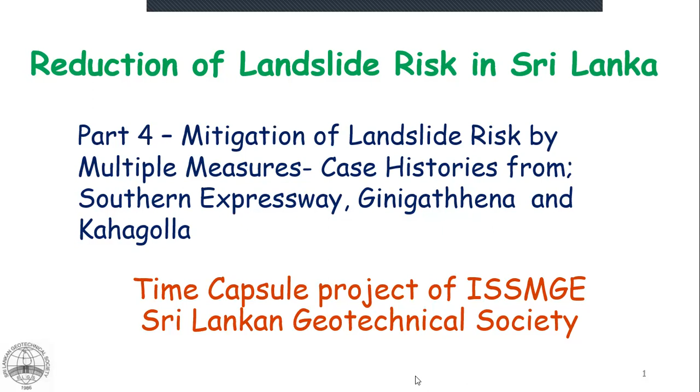As discussed in part 3, Professor Karl Terzaghi said that if a landslide has started to move, the means for stopping it must be adapted to the process which started the slide. So we should investigate and find the reason for failure, and in our countermeasures, attack the very reason that initiated the failure. In the last part, I talked about our experiences in stabilizing landslides by modification of the slope geometry and drainage.

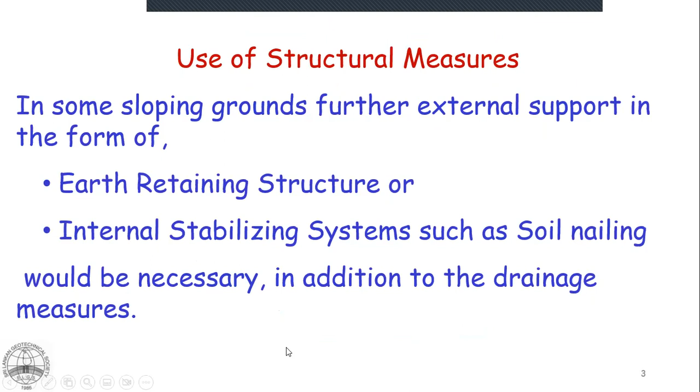In some sloping grounds, further external support in the form of earth retaining structures or internal stabilizing systems such as soil nailing or anchoring would be necessary in addition to the drainage measures. So these are some examples, some of our experiences.

This particular cut of the natural slope had to be done to provide a path for a bypass road in the construction of the Southern Expressway. There was a house at the crest of the slope, so if we had cut it to a normal gradient that the soil can withstand, the house would have to be removed. By constructing a gabion wall at the toe and providing surface drainage to efficiently run off the rainwater, we were able to do the cutting and construct the necessary road while keeping the house there as it is. The surface of the slope was protected by vegetation.

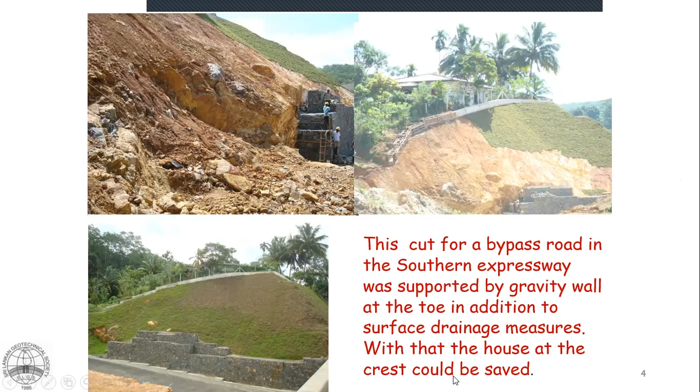This is another example. I have earlier mentioned that our slopes are quite stable during periods of dry weather due to high prevailing matric suction. This is the Colombo-Katunayake Expressway. Above it is the Negombo Road, A3 road, which is a major road. So this cut has to be made across this major road for the construction of the Colombo-Katunayake Expressway. You can see these near vertical cuts were done without any problem during periods of dry weather, but there are buildings close by, and this slope will remain stable only if the weather remains dry. But that is not the case in nature.

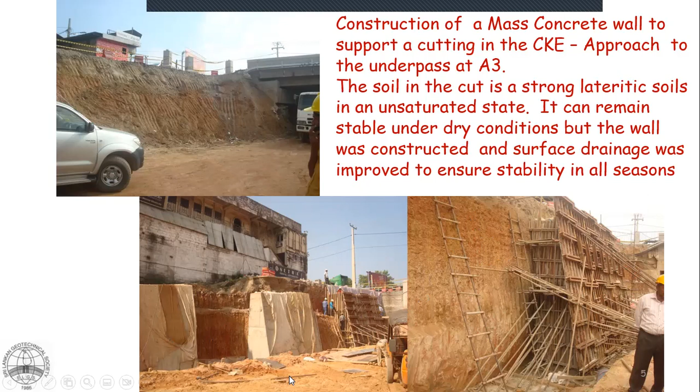So when rainfall occurs, there will be erosion, loss of matric suction, and failures, as we have seen in many places. In this case, the cutting was done during periods of dry weather, taking advantage of the high matric suction. A mass concrete retaining wall was done with weep holes and all the drainage measures, and there was surface drainage at the back of it, providing protection for all seasons with this construction.

This is again construction that we have done at a number of places. There are unstable slopes in the premises of schools, hospitals, etc. So we have done the cuttings during periods of dry weather, got to a hard surface, near vertical, maybe about 70-80 degrees inclination, and by placing the geotextile and the drainage layer, a retaining wall of random rubble masonry or mass concrete retaining wall is done with a back batter. Our analysis shows that when you have a back batter, the retaining wall design can be highly optimized.

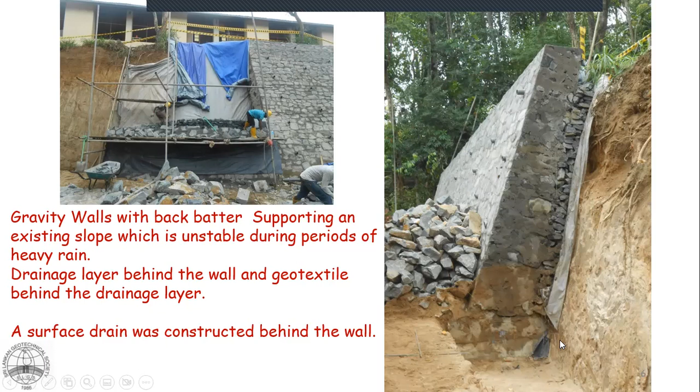So you can see the weep holes in that, and the geotextile placed at the back of it can be seen. So we can find a period of dry weather, and this construction can be done, ensuring the stability of this near vertical cut, and then protecting it for all seasons.

Another activity that we have used quite often is soil nailing. So in unstable slopes, after providing drainage, we have installed soil nailing, which is installation of a reinforcement in a drilled hole at appropriate spacing to an appropriate design length. Soil nailing is a passive system where the tensile loads in the nail will mobilize when the slope starts to move. Anchors, on the other hand, are an active system where the installations are pre-stressed. But in Sri Lanka, we have mostly used soil nailing up to lengths of about 12 to 16 meters.

As seen by this modified Bishop's equation, when the slope starts to move, tensile load will mobilize in the reinforcement - that is with a plus sign in the numerator, increasing the normal stress, and with a minus sign in the denominator, decreasing the shear resistance to be mobilized to maintain equilibrium. So both of these will ensure the factor of safety is increased. We have done our designs installing different patterns of soil nailing. To protect the nail from corrosion, it is placed at the center of the borehole by use of centralizers.

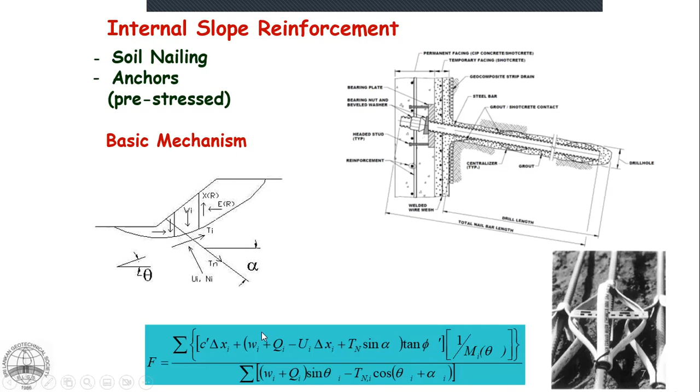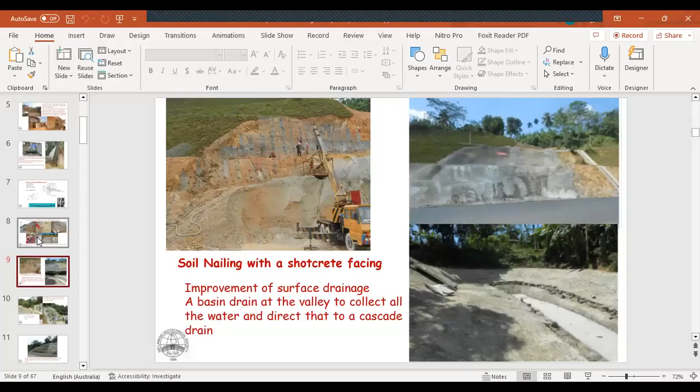This slide shows the construction sequence. This is a slope which was found to be unstable after excavation. It was stabilized by a soil nailing arrangement: drilling the hole and installing the reinforcement bar and grouting with a tremie pipe starting from the bottom, then connecting the nail heads with reinforcements. Very simple reinforcement was placed for the surface, and the surface was shotcreted.

This is another failed slope in the Southern Expressway. Cutting was done, but the drainage measures were long delayed, so as a result the slope failed. This is a zone in a valley where there is a lot of water coming from the adjacent slopes, so in addition to the nails, the surface drainage had to be improved at that area.

This shows the basin drain constructed to collect water coming from all directions, and how it was diverted down through this cascade drain. The nailing was done, and the nail heads were connected by shotcreting.

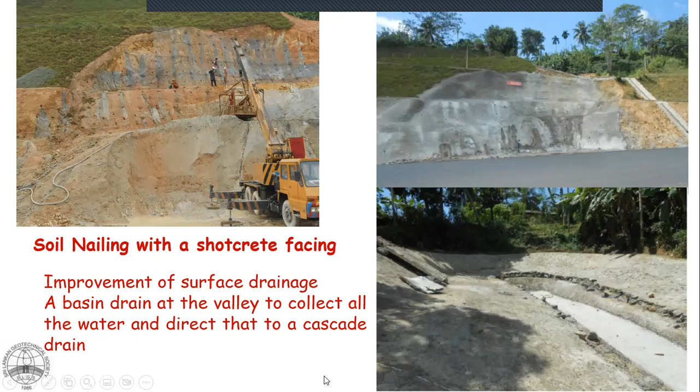Later on, we tried to avoid shotcreting as much as possible. So in the stabilization of these slopes on the Kandy Mahiyangana Road, you can see the nail heads were connected by beams, and also connected by a mesh of particular tensile strength. Geogrids, the geotextiles made up of coir, were used, and vegetation was introduced through hydroseeding.

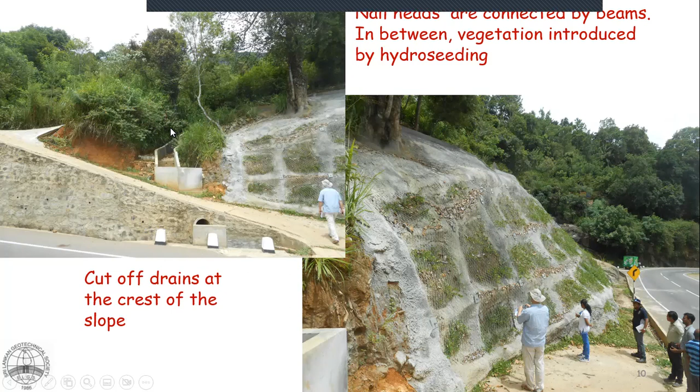As discussed in an earlier presentation, we do the hydroseeding and protect the seeds till they are grown with the geotextile made up of coir. Here you can see the cutoff drain done at the crest of the slope.

Just next to it is closely fractured rock. I talked to you about highly variable conditions in the sloping grounds in Sri Lanka. Here it has weathered sufficiently so that we can grow this vegetation, we can introduce the vegetation. But here it is with much less weathering - it is closely fractured rock here.

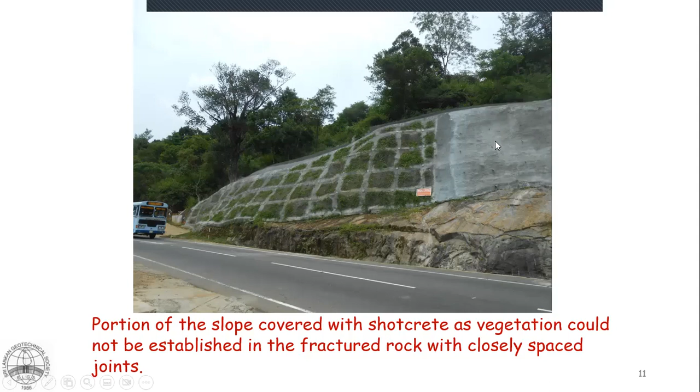So the nails here were connected by the reinforcements, and the surface had to be shotcreted. This is another example of protecting an unstable sloping slope at a school in Kandy, Mahamaya College, Kandy. The nail heads were connected by the beams - you can see the reinforcements in the beam.

This is the initial state of the slope. During construction, the beams are completed and vegetation was introduced in between. This is after the growth of vegetation to some extent - at this stage it looks like a natural slope. With further growth of the vegetation, it will appear as a natural slope, aesthetically much more pleasing than a shotcrete surface.

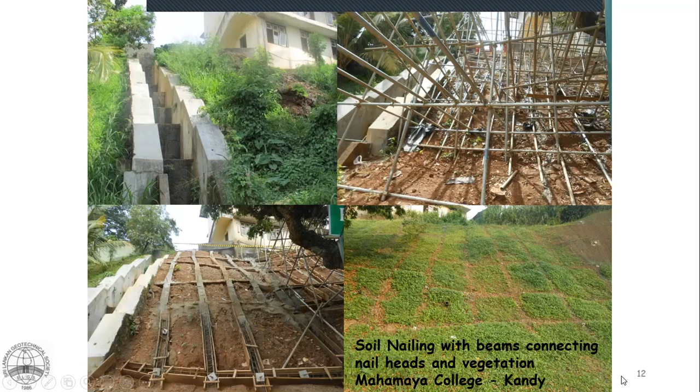We used that technology in the stabilization of about 18 failed slopes on the Kandy Mahiyangana road, a highly popular highway in Sri Lanka. Here you can see the nail heads, and in this case we used concrete pillows, concrete nail heads designed to prevent local failure. You can see the adjacent site - because of that site condition, we could not use this technique.

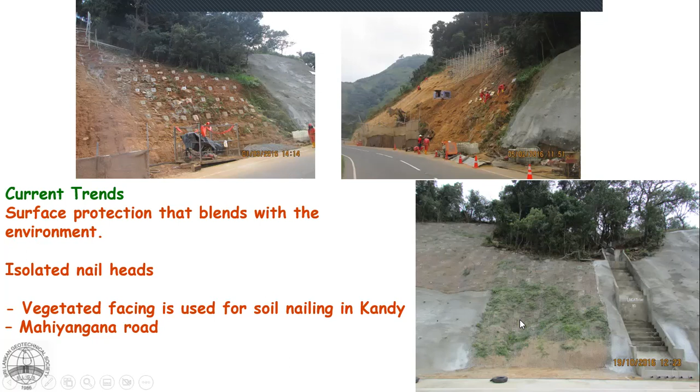We had to shotcrete it. Here you can see individual nail heads connected by a tensile steel mesh with a particular tensile strength, and then with the help of the hydroseeding technique and coir geotextiles, vegetation was introduced.

You can see further details of that. Here you can clearly see the nail heads, a concrete block, concrete nail head, and then the steel mesh connecting all the heads, which is preventing local failure, is seen here, and the coir geotextile is also seen here, and you can see vegetation is slowly coming up.

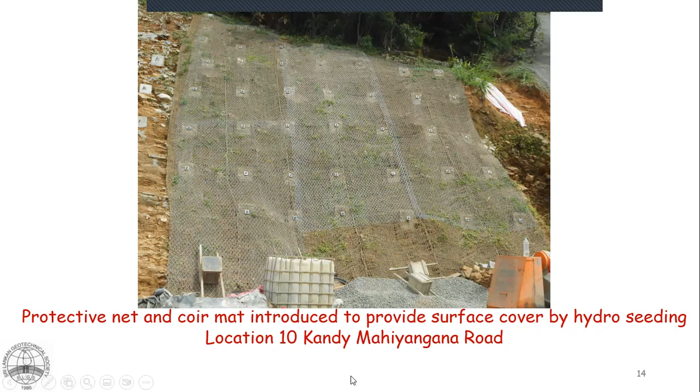Further pictures of the same road - in certain parts of the highway we had to use shotcreting, but in many other places we managed to attain stability with nail heads connected by the steel mesh, introducing vegetation in between. At the toe of this particular slope, shotcrete was used; everywhere else it was covered with vegetation.

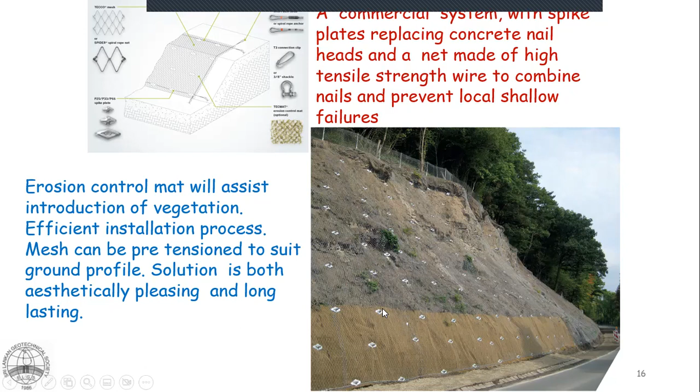At a few places, we use this metallic spike plate instead of the concrete nail head. It is much quicker, but with the metallic spike plate, the load coming onto the steel mesh is much greater. So to prevent shear failure, punching shear and general shear failures, we have to use a mesh of greater tensile strength. Therefore, this was not used very much in Sri Lanka. We have always gone for nail heads connected by beams, or isolated nail heads made of concrete connected by high tensile wire mesh.

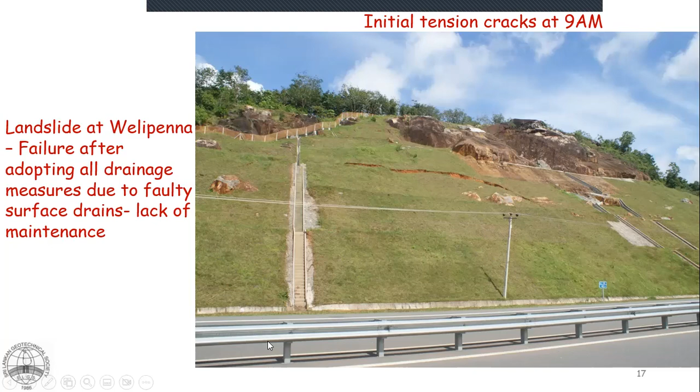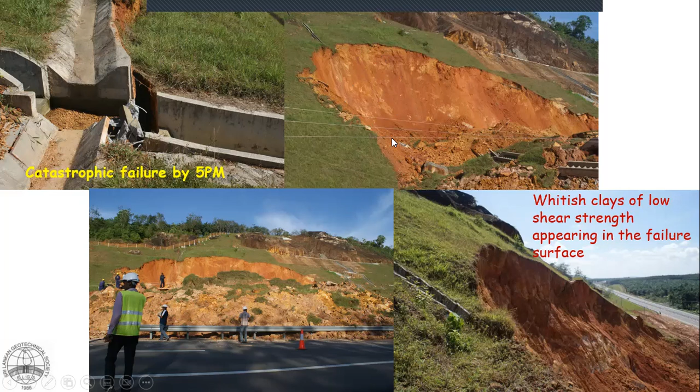So you can see before the failure. With the initial movements, these drains sheared, and by 5 o'clock the catastrophic failure occurred. The depth of the failure surface is not very large, quite shallow, and the surface is not very wet. The back analysis showed that this happened due to infiltration of water through the relict joints in the system and loss of matric suction there. There was no rise of ground water table witnessed with that.

Matric suction was completely lost due to the drainage of infiltration of water through the relict joints. So the surface left behind by the failure was unstable, and it had to be rectified. We used multiple measures there. The steep escarpment was rectified using soil nailing. At the top level, we needed reinforcements of length 16 meters, which were later replaced by anchoring instead of soil nailing. At the toe, we put up a toe retaining wall. That is the road area, so all the debris was removed, the toe retaining wall was done and backfilled. With the toe retaining wall, we were able to optimize the design of the nailing system.

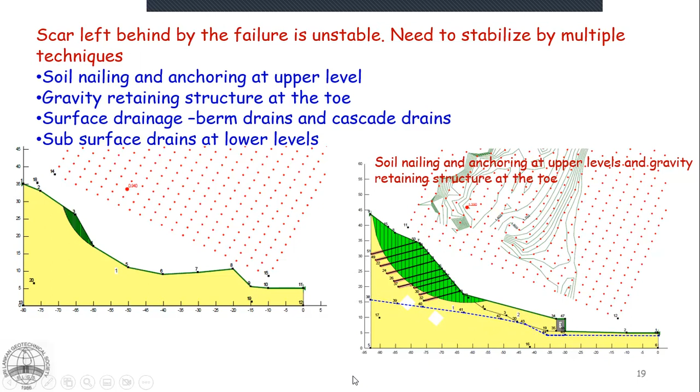The ground water table was low, but we introduced a certain number of subsurface drains because our analysis showed that if rainfall continues for some time, the water table would rise, especially near the toe. So we installed surface drainage and subsurface drains as well. This is a design drawing for that, showing the proposed subsurface drains coming into a trench drain, with a gravity retaining wall at the toe.

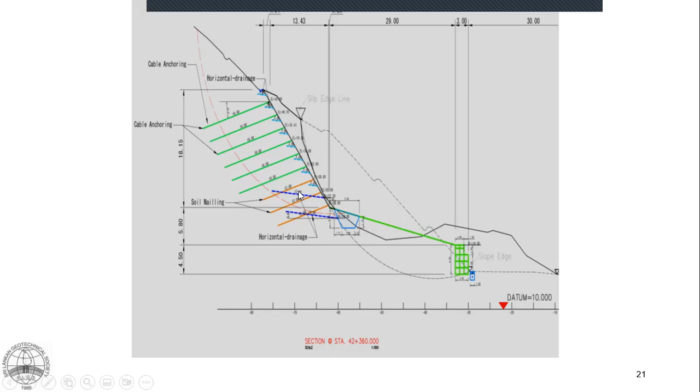This shows the initial slope profile and the failure profile. It was cut back to this profile. 16-meter long reinforcements were installed at the top level, and 12-meter long at the bottom level. Later we decided to use anchoring for the longer reinforcements, and the shorter ones remained as nailing. The nailing could be installed using this cage mounted on a crane, but for anchoring we needed a strong platform. This shows the nailing work, and that is the platform done for anchoring. This is the anchor installed with the faceplate and being tensioned, and the surface was shotcreted.

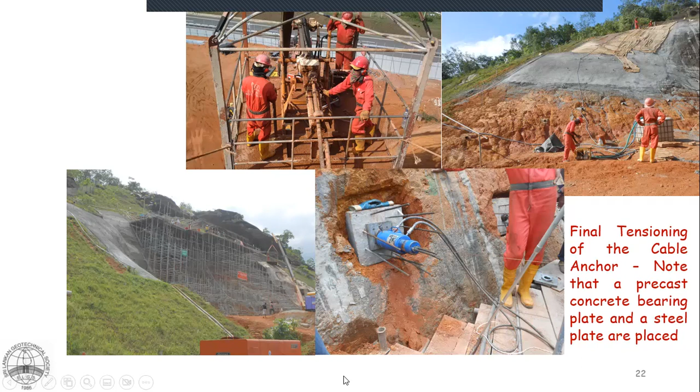Also, with the geological mapping, we found there are relict joints, about 2 planes of relict joints, one oriented that way. During construction, when drilling was done for the soil nails, there was water gushing out of these drill holes - rainwater had been trapped in these holes and was under some pressure. So with the drilling, water was gushing out. You can see this worker has been covered in mud due to that water coming out.

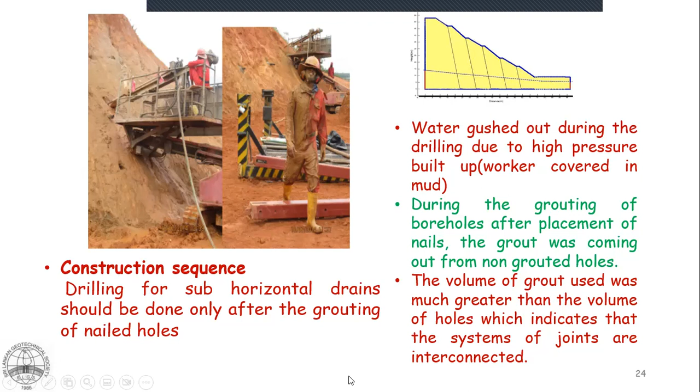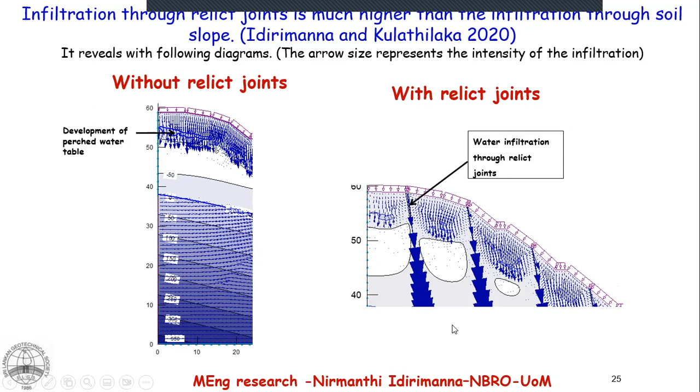We did detailed studies modeling the infiltration into the relict joints. Without the relict joint, this would be the seepage pattern. If we model the relict joints, filled with weak, highly permeable material, a lot of water gets into the slope through that, and when modeled, the factor of safety deteriorates much faster.

We applied the rainfall that triggered the failure, using the records we had, on the slope as it existed before failure, to see how pore pressure changes would happen and how the factor of safety would vary.

If the surface drainage measures were working properly and relict joints were not there, factor of safety would remain just below 1.2 without causing failure. The loss of matric suction and deterioration took place with infiltration through the relict joints, as indicated by this line, with continued rainfall under conditions of relict joints present and faulty surface drains bringing the factor of safety to a value less than 1.

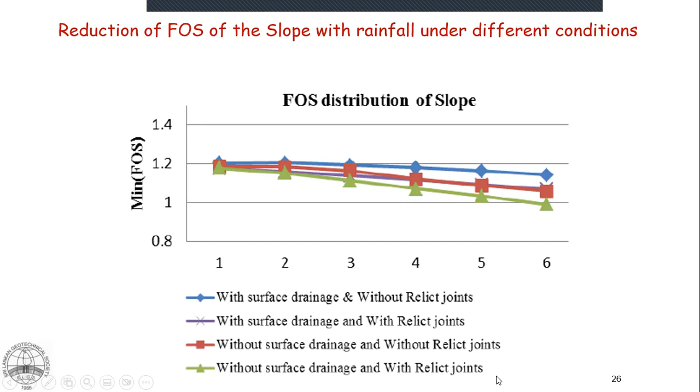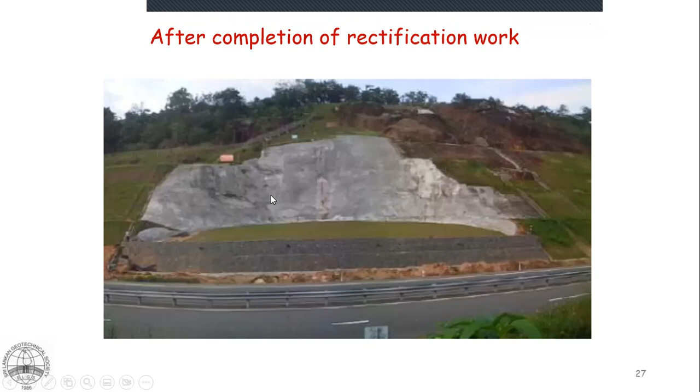This is the view of the slope after the rectification measures: a Gabion wall at the bottom, the nailed slope surface was shotcreted, and that is the toe filling.

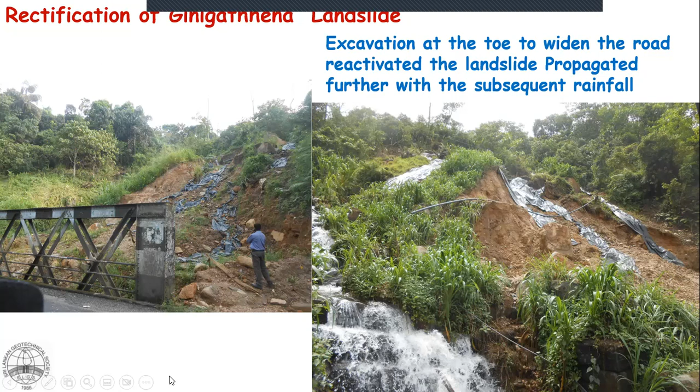There was another failure by a highway due to unengineered construction. Highway authorities wanted to widen the approach road to this bridge, so they did a minor excavation at the toe without realizing this was an old landslide. That excavation activated the landslide, and within 2-3 days a heavy rainfall came, so the failure propagated further up, putting the bridge in danger. NBRO was called up to help in that situation.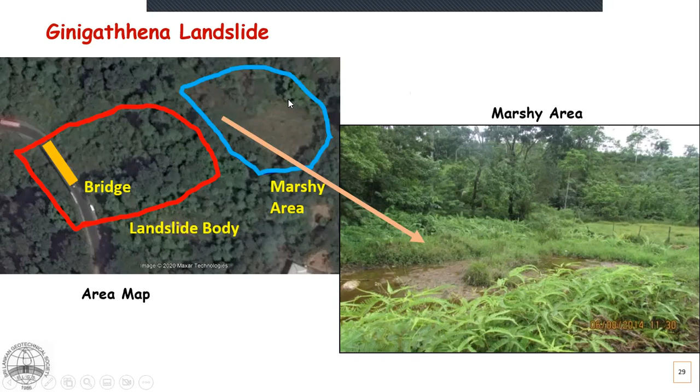We did our investigations and found further up the slope a marshy area. That is the landslide body, with the bridge at its edge. This is a view of the marshy area at the crest of the slope, where a lot of water was stagnant, providing water to the slope and making it unstable.

Topographical surveys were done, cross-sections established, and a number of boreholes done along the slope direction to establish subsoil conditions: loose colluvial soil, medium dense sand, and residual soil further down, with bedrock at further depth. That is the bridge area.

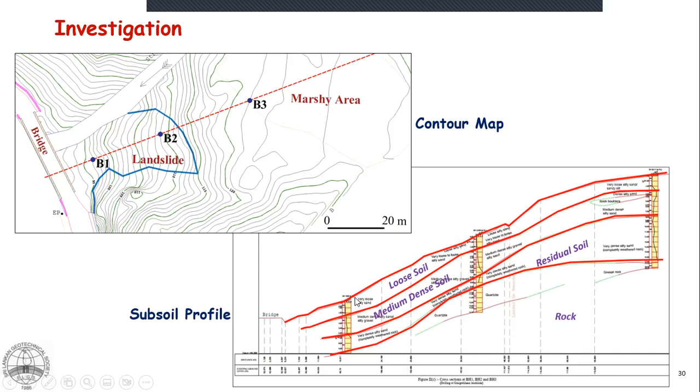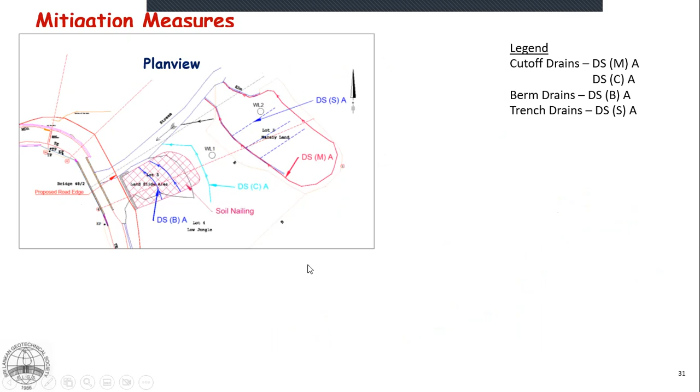The road has to be widened, so we'll have to excavate up to some distance in this unstable slope. Mitigation measures were planned for the marshy area with high water table. We have to improve surface drainage there, lower the groundwater table, and further with subsurface drains lower it further, and for the widening we need to use soil nailing.

This is the sketch of the stabilizing measures adopted: 16-meter long nails, not anchors, were used at the top along with subsurface drains. The construction was done in stages, with Stage 1 involving excavation up to a point, nailing, and so forth.

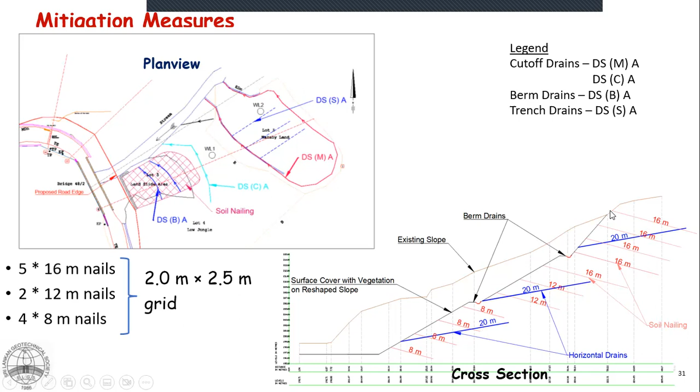Before the nailing, surface drainage was done to lower the groundwater table. This is the kind of reinforcement used, with 3 berms, berm drains, subsurface drains, and soil nailing done stage by stage with top-down construction, to ensure stability throughout the work.

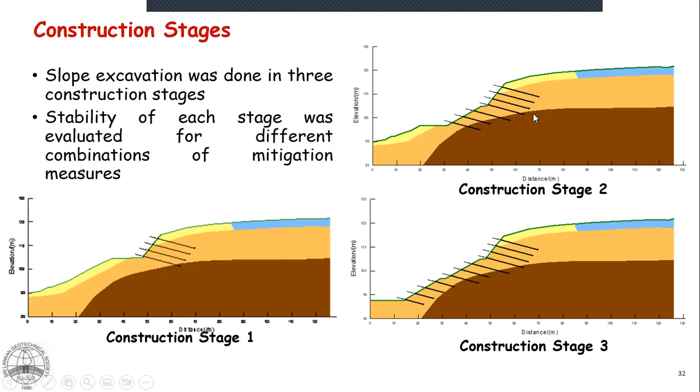Construction was done in 3 stages. Stage 1: excavation up to a point, after surface drainage was improved, along with subsurface drains to lower the groundwater table. Then move to Stage 2: excavation and nailing along with subsurface drainage, and Stage 3.

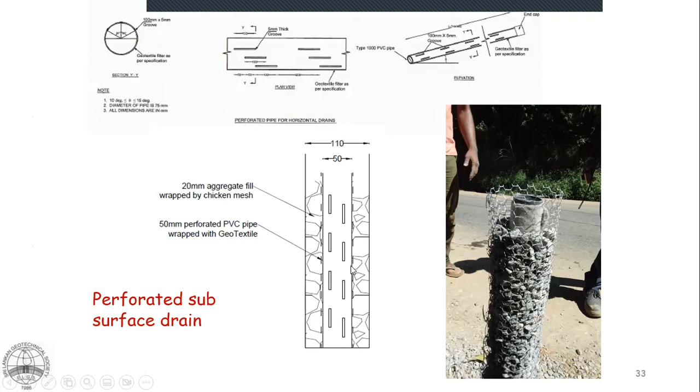These were some typical arrangements used for subsurface drains, perforated pipes, sometimes with this metal mesh. I mentioned that at the top level, there was the waterlogged area, so these trench drains were done: a surface drain along with a trench filled with rubble, supported by a geotextile and a drain pipe here.

That was the first thing to do, to lower the groundwater table at the top level. So you can see the construction work, and here you can see how the water was getting discharged through surface drains as well as through this trench drain.

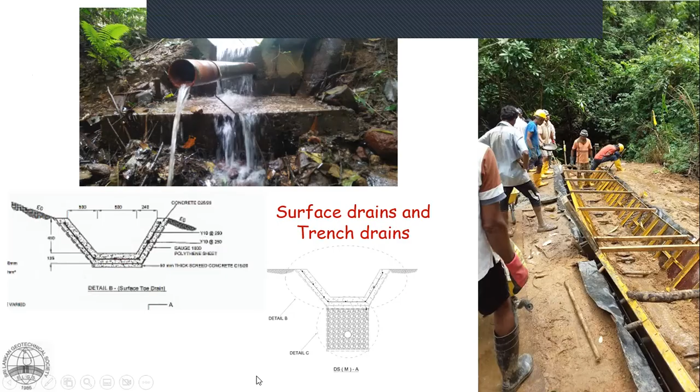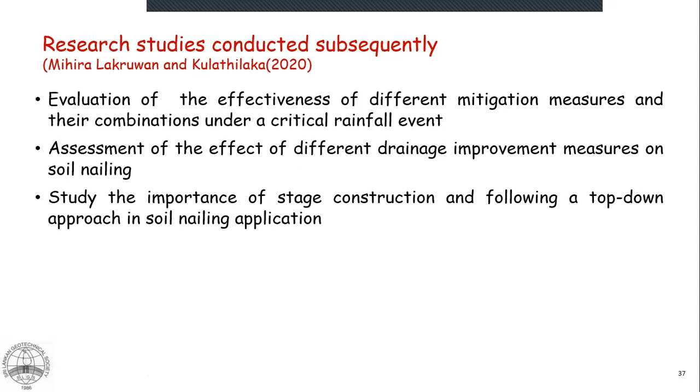That was a very interesting and successful story of rectification of a slope with multiple drainage measures. After that, we had an MSc student looking into further details, the effectiveness of multiple drainage measures. In his research, he evaluated the effectiveness of different mitigation measures and their combination, and how this combination can make the system very economical.

The methodology applied involved a SEEP/W model that was validated by modeling a rainfall event and monitoring the groundwater table variation in instrumented boreholes, and also by back-analyzing the failure that took place with the initial excavation and how it propagated with the rainfall. This way we could validate the Slope/W model to a certain extent.

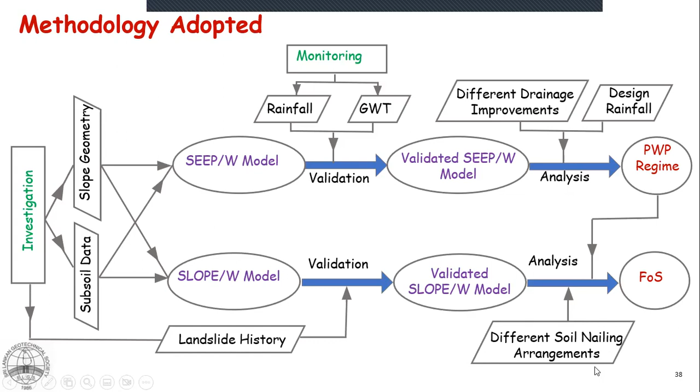After that, we analyzed the effect of nailing and drainage to enhance the stability. Earlier I showed you the stage 1, 2, and 3 constructions.

So we analyzed what would happen if a critical rainfall occurred. This shows the critical rainfall for this particular area, established based on past rainfall records.

So if this critical rainfall falls on the site during construction stage 1 or 2, what would happen? If there were surface drains but no nailing, the factor of safety would be maintained at a very low level.

Surface and subsurface drains together, but with no nailing, will maintain the factor of safety slightly higher. Then with only surface drains and nailing, it will be maintained at that level.

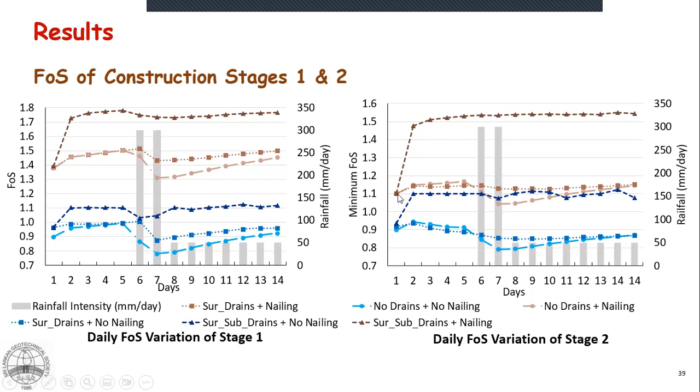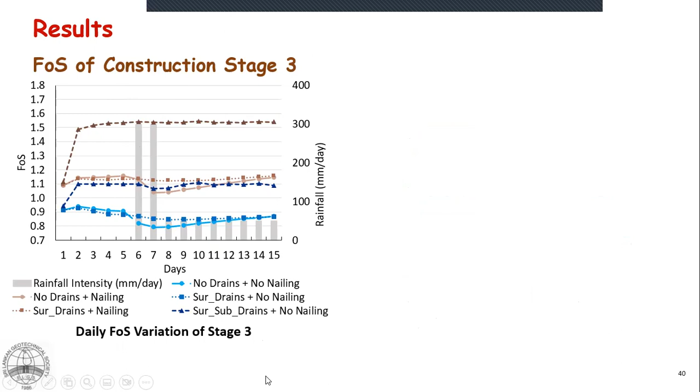This is how it would happen in the stage 3 construction. Again, the critical point to note is that full stability will be achieved only when all the measures - surface drainage, subsurface drainage, and nailing - are in place. When nailing is not in place, the factor of safety will be much lower. We did this analysis for stage 1, 2, and 3 constructions to see how that would play out.

This is some pictorial view of the failure surfaces obtained. If there are no drains or no nailing, this is the failure surface that would be obtained, with that particular safety value.

When surface and subsurface drains are in place and nailing is done under the critical rainfall condition, this situation gives the lowest potential failure surface, but with a high safety margin. So to ensure this adequately high safety margin, we need to have both surface and subsurface drainage measures along with nailing.

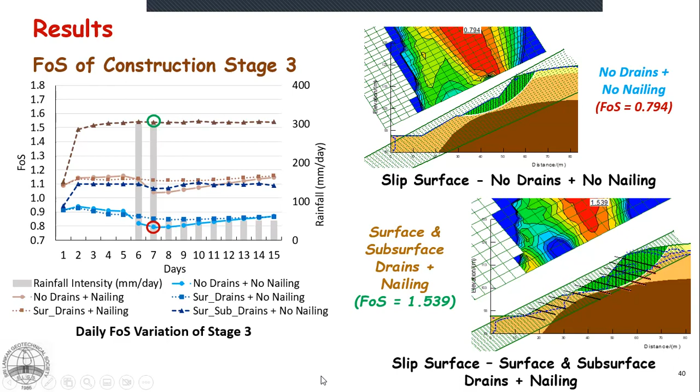Now, how the drainage measures would economize this was further studied by analyzing what would happen if you install this same nailing arrangement but without drainage. Practically, it is not possible because you can't do these drain nails without lowering the groundwater table. But hypothetically, we studied, say, if we install the nails without lowering the groundwater table, then the factor of safety would be just around 1.

So to bring it to an adequate level, we'll have to install more nails. The total nail length, this is the actual design that we did, was 1,624 meters. But if we have done the job without drainage measures, you need about double the length of the nails. Spacing has to be reduced and the length has to be increased.

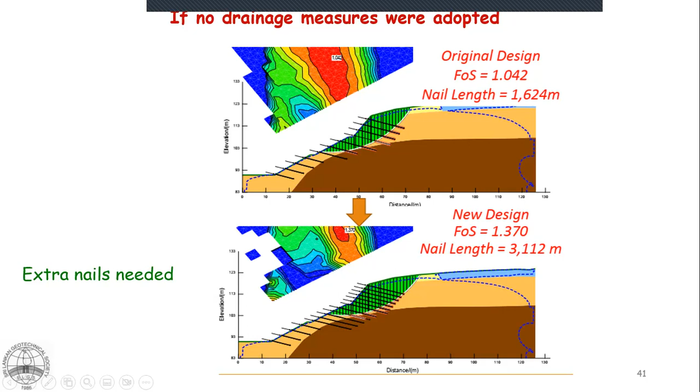Practically, this is not possible because with the high groundwater table, the practical exercise of nailing would be very difficult. The boreholes would collapse in the ground under conditions of high groundwater table. So if only surface drainage measures were done without subsurface drains, again we can see the design implemented will have a lower safety margin. To increase it, you need to do a lot more nailing.

So the nailing design can be highly economized when you combine that along with surface drainage and subsurface drainage. The construction activity will also be greatly simplified, may be much easier without any collapse of the boreholes when you have lowered the groundwater table with subsurface drain. So the general findings of that is listed here.

This ancient landslide at Ginigathhena reactivated due to excavation, and it was stabilized using extensive mitigation measures. Surface and subsurface drainage measures could enhance the slope stability to some extent, but soil nailing is mandatory to achieve the stability requirement and necessary widening of the road.

So it is not just to make the slope stable as it is. Some widening is required at the top. So that widening is the one which reactivated the failure. So in that case, nailing is an essential component, and the construction sequence.

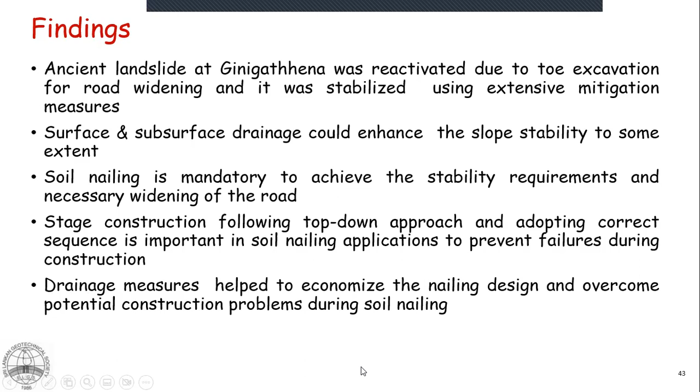So we have to plan the construction sequence properly. It must be top down. Adopting the correct sequence of drainage and nailing to prevent failure during the construction. And finally, drainage measures help to economize the nailing design. If the groundwater table remains high, you need a lot longer nails and laying nails at closer spacing.

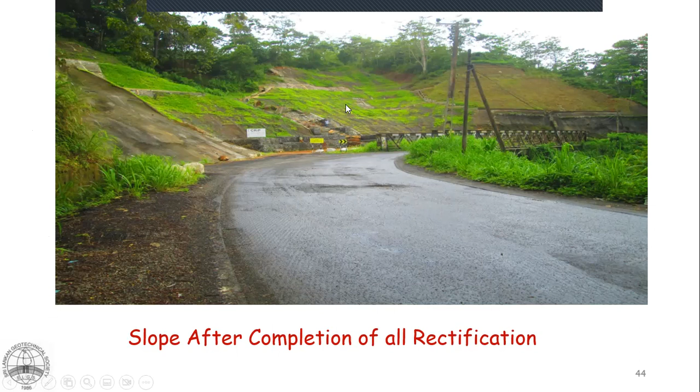So this is the slope after the implementation of the rectification measures. You can see the vegetation has come up in between the beams that connected the nails, and it appears to look like a natural slope.

This is again another landslide in the main road system of Sri Lanka, in the road to Badulla at Kahagolla, which had been troubling the road authorities for a long period. So that is the main road to Badulla. It was a slow-moving landslide. So there is the boundary identified.

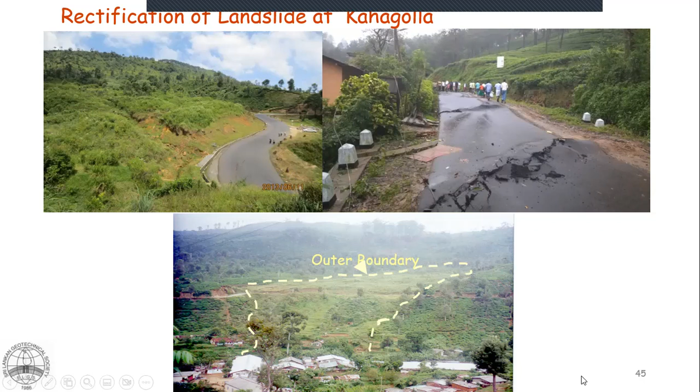So during the periods of heavy rain, it is moving. The head of the landslide is further up the slope. This is a normal period. So it is moving down, lifting up and damaging the road, and disturbing the traffic. So a lot of subsurface investigations were done through boreholes and geophysical techniques, and instrumentation was done, from top to down the slope.

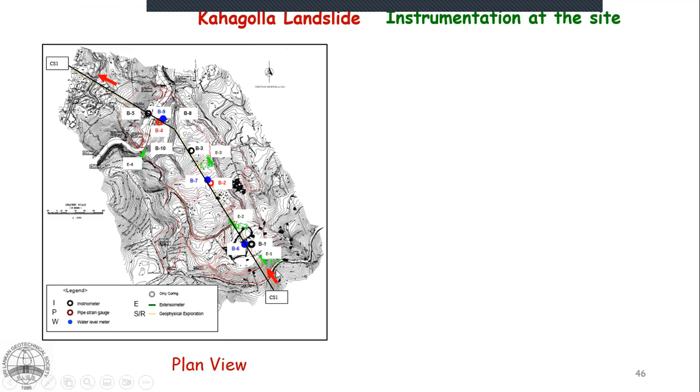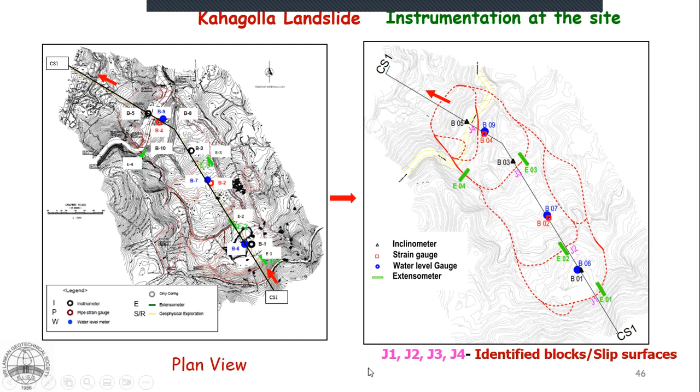And with that investigations, the failure surfaces were identified. It is not a single failure surface. It was a composite failure made of different failure surfaces, as illustrated by this plan. The blocks of failure were illustrated in this plan as well as in this cross section. So there were 1, 2, 3, 4 different blocks of failure.

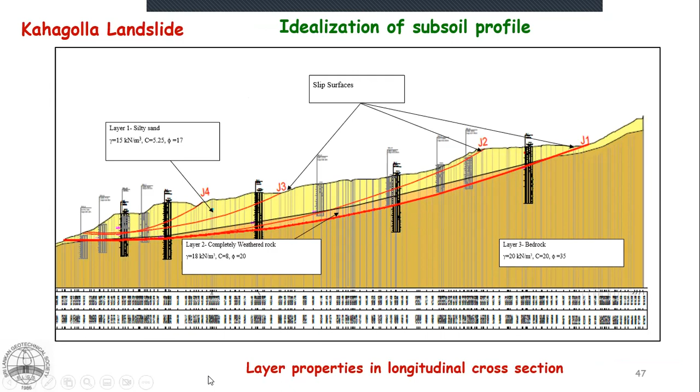And the recordings of the extensometers, you can see the different blocks identified. Extensometers were installed across the blocks. You can see 1, 2, 3, 4 here.

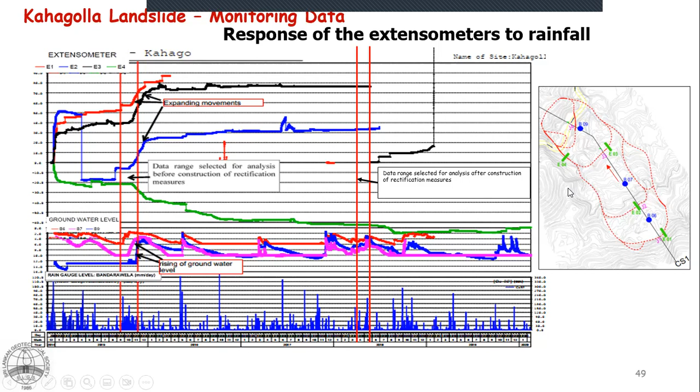So the movements recorded at these extensometers during the periods of heavy rain are plotted here. You can see that with these periods of heavy rain, the movements are increasing, in most of these extensometers. So it is a slow moving landslide that gets activated during the periods of heavy rain. As you can see, it is well instrumented, and the slope, the failure pattern, the failure surfaces were well established and instrumented.

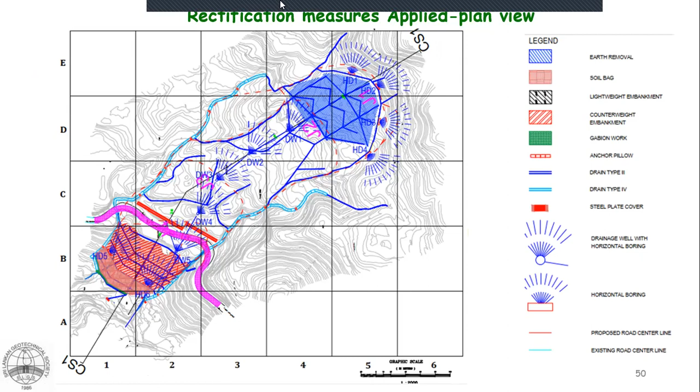Then with that, stabilizing measures were proposed for this road. The stabilization measures were primarily drainage, including surface drainage measures with various drain types, as shown in this plan view.

Then subsurface drainage in the form of fan drains, and there were a number of drainage wells, deep wells, from which drilling was done in different directions in a fan-like pattern. That is the landslide area, so the water there had to be drained, achieved by these fan-type drains done from the surface and from drainage wells.

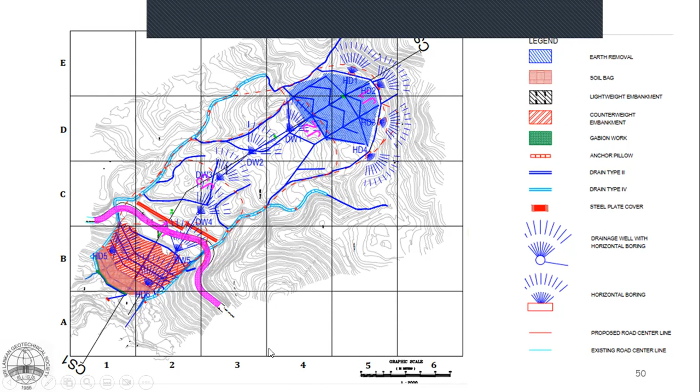There were 6 drainage wells, and some weight was reduced at the crest, with embankment done at the toe. Remember, one of the first things discussed is removing the load from the top and adding load at the toe, and also some anchoring was done, a series of anchors.

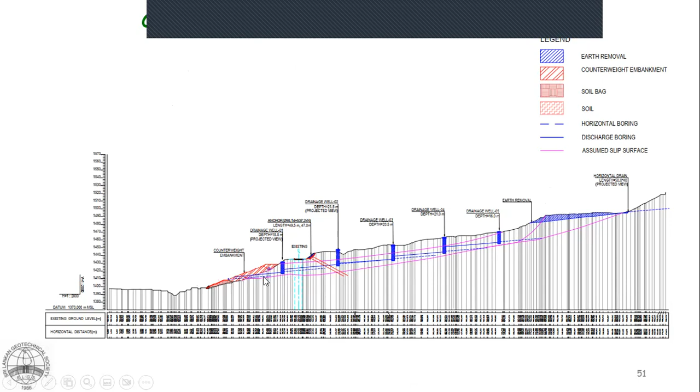You can see this further through the cross section. That is where the load was removed and placed back here. That was the road, and these were the drainage wells. From a drainage well, a series of fan drains were done, and the water collected at the bottom of the drainage well was taken to the next one and out like that.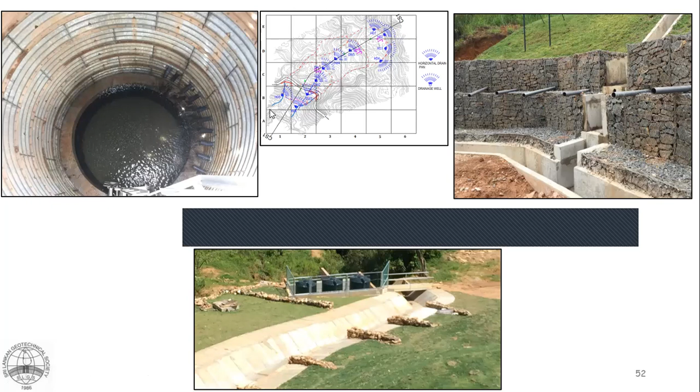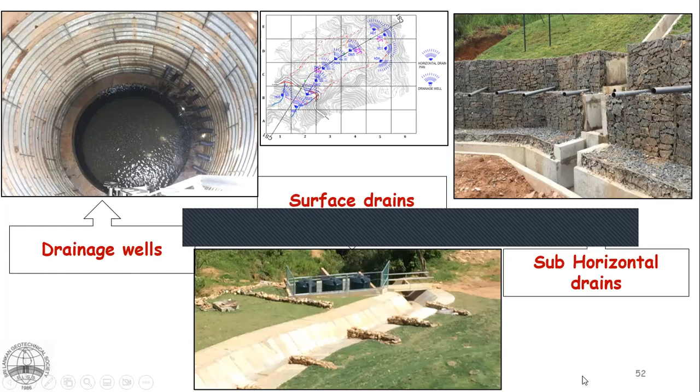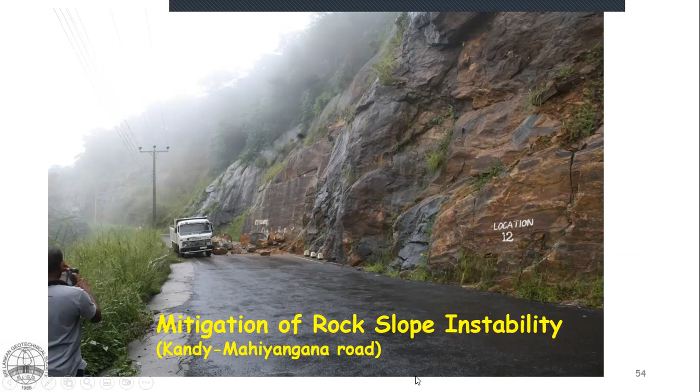Now, another challenge we had was rock falls. It is less common in the country, but in some places it is a critical issue. This is the Kandy Mahiyangana Road, where exposed rock has joints oriented in the adverse direction. During periods of heavy rainfall, pieces can come down, causing disturbance and threat to traffic. You can see this situation, a quite tragic situation.

Luckily, no one was injured here, though larger blocks have come down, so this is a grave concern. We have stabilized many other soil slopes along the Kandy Mahiyangana Road, but this was delayed due to the lack of expert contractors in the country. Later on, with Japanese support from Japanese contractors, we did the work.

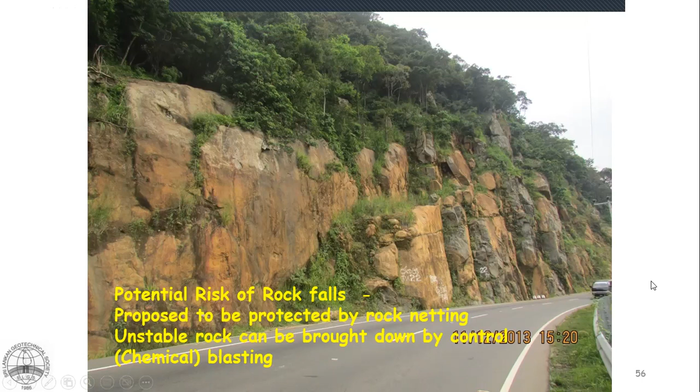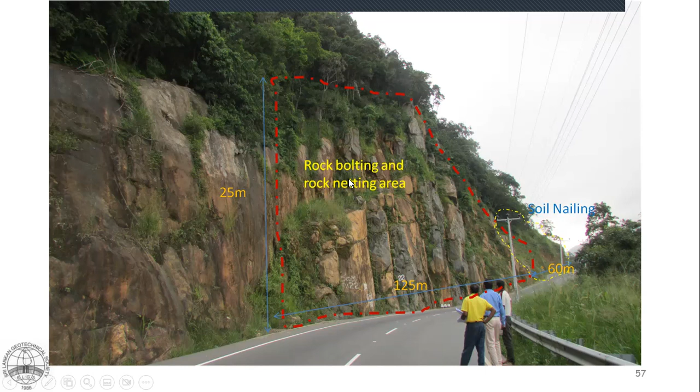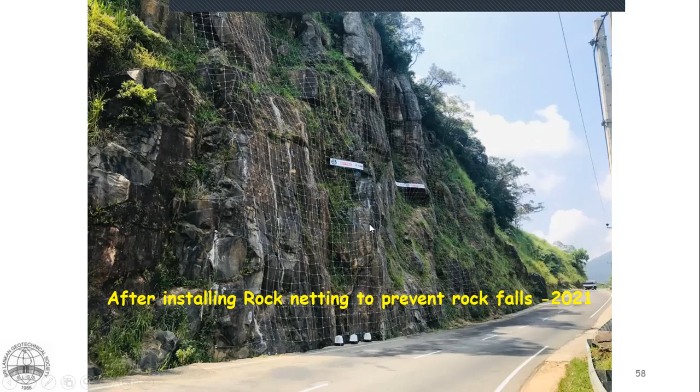This is a view of the jointed mass. Our mapping identified that we need to protect it by nailing, rock netting, or rock bolting in this area. This is how it looked after finally installing the rock net. The netting was drilled in at stable locations, and it will prevent any blocks from coming out, keeping the blocks as they are and preventing them from falling off their original position.

This is a further view of rock netting. At some locations we did curtain netting, so small pieces can come down and be contained inside the net, preventing them from coming out onto the road area. The falling pieces are held there by the rock net.

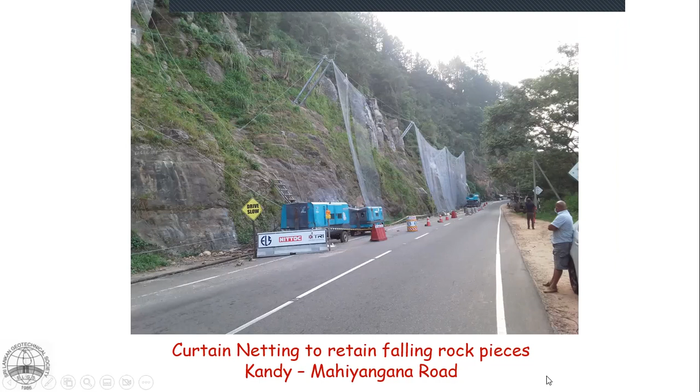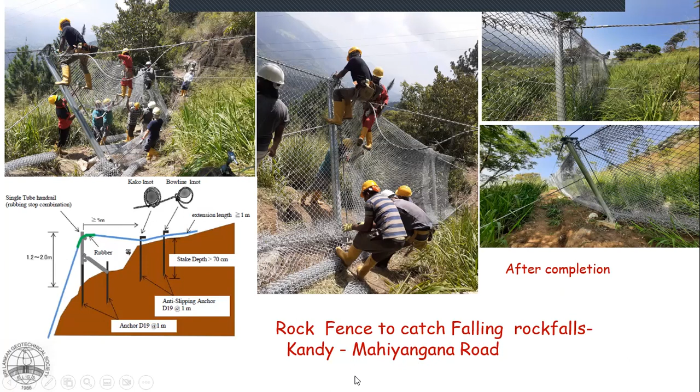In conclusion, sloping grounds in Sri Lanka are made of residual soils, rocks at different levels of weathering, and colluvial soils from previous landslides. The groundwater table is generally low during dry periods, and slopes remain stable due to the prevailing suction. But with rainwater infiltration in an uncontrolled manner, these slopes would become unstable and failures would occur.

The challenges offered by the rain-induced landslide are well taken by the Sri Lankan geotechnical engineers, and we have made good progress in reducing the risk of landslides. Deficiencies in the process we follow were identified, and continuous efforts are made to improve.

The scope of the landslide hazard zonation project is being widened now to include the flow paths. So not only the initiation parts, now we identify the flow paths and the depositional areas, and incorporate them in the maps. So the whole risk area is identified, and these are all rain-induced landslides.

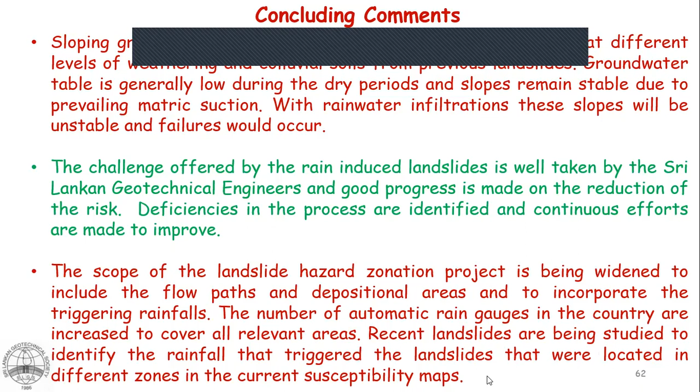The number of automatic rain gauges in the country has increased to cover all relevant areas. We study recent landslides to identify the rainfalls that triggered them. With the current records from rain gauges available in many parts of the country, for more recent landslides we can identify what rainfall triggered a particular landslide. So we are doing a detailed study to identify the triggering rainfalls, threshold rainfall values for different zones of different susceptibility.

We have a design office at NBRO. We do the design of mitigation work for landslides and the rectification work for slopes which have already failed. The rectification and design measures are done at the design office, where there are a number of graduate civil engineers with years of experience, guided by senior geotechnical engineers.

We from the universities work in close association with them. Our team also includes engineering geologists and geologists, who provide us good understanding of the background geology. When we visit a potential site, a complete team of engineers and geologists visits to discuss the features noted and observed, and come up with the designs.

In the process, we carry out geological investigations, geophysical investigations, and geotechnical investigations through boreholes, and wherever possible install monitoring equipment as shown in previous slides. We gather all the actual information through this process of investigation and monitoring and come up with a design. Once we come up with a design, the team visits the particular site with the design in hand to verify its applicability under the site conditions.

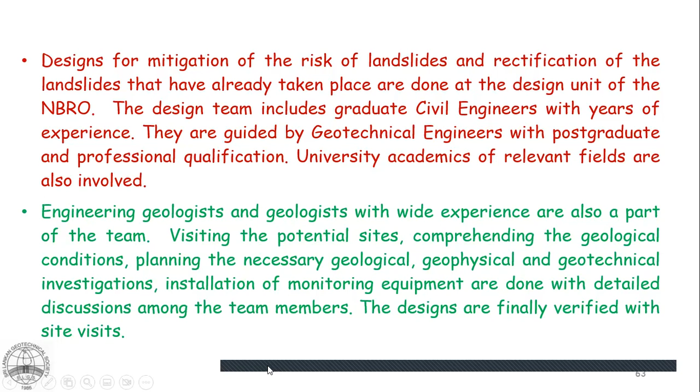Over the years, institutions such as the Norwegian Geotechnical Institute have provided great assistance through many collaborative studies. NGI experts have assisted in training NBRO staff on aspects such as flow path modeling, which is currently being done, and also in the design of rectification measures. They have also provided us drones to conduct surveys under difficult ground conditions, to obtain 3D terrain models and establish the slope topography.

They have trained NBRO staff to this extent, and also provided us with modern techniques like ground penetrating radar and cross-borehole logging to enhance our investigation capacity. Institutes like JICA have also provided collaboration in many projects. For the Kahagola landslide they were highly involved in the design measures, and also in the Badulusirigama landslide, where JICA experts worked together with NBRO scientists and engineers to come up with these designs.

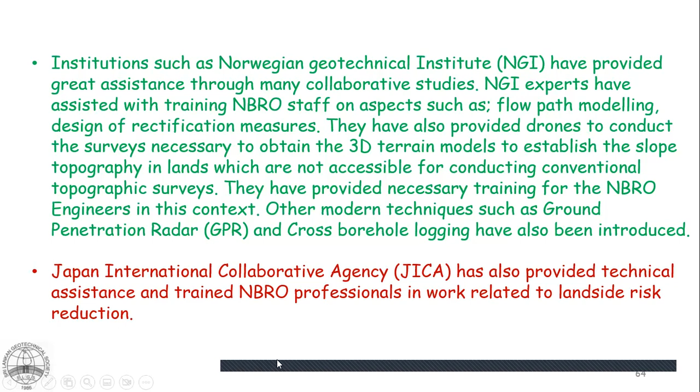A large number of projects were done within the last two decades to reduce landslide risk in the country by mitigating the instability of critical slopes along various infrastructure facilities such as roads, railways, schools, and hospitals. These projects were funded by the Sri Lankan government and through loans offered by organizations like the World Bank and ADB.

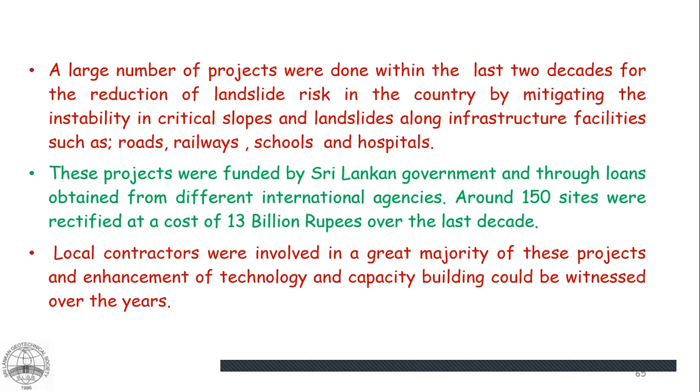There were around 150 sites rectified within the last decade at a cost of about 13 billion rupees. Local contractors were involved in the great majority of these projects. In certain situations we got foreign expertise, but local contractors are involved greatly in most of these projects, so their capacity has also increased.

Now we have to do further work in areas like the monitoring of these landslides globally. We have plans to use techniques of terrestrial photogrammetry, digital photogrammetry with drones, LiDAR survey, and InSAR satellite techniques to monitor landslides. We need to monitor critical slopes as well as how stabilized slopes are behaving under different critical rainfalls.

Many government organizations such as the Road Development Authority, Disaster Management Center, Departments of Meteorology, Education, and Health, and the civil engineering community in the country have collaborated with NBRO over the years in this national effort to reduce the risk of landslides. This effort will continue with the incorporation of emerging new technologies and with the advice and goodwill of all the different stakeholders. Thank you.